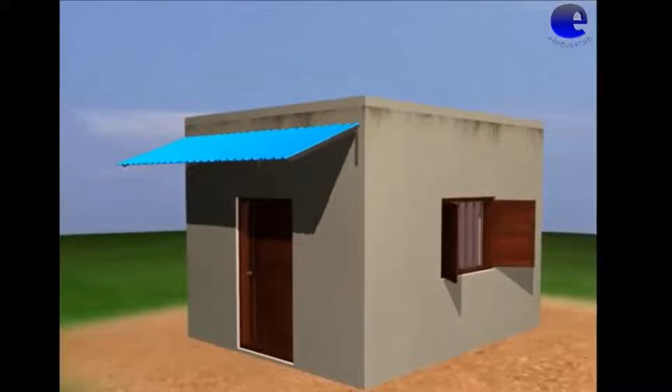A simple building is shown here. A single room, and single-story reinforced cement concrete building. This is the typical skeleton of the reinforced concrete structure. The slab is supported by the beam.

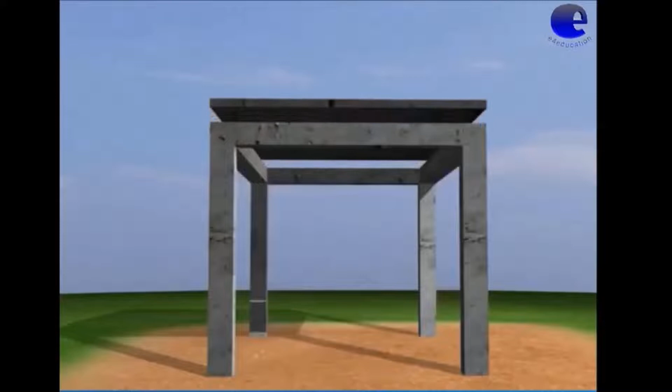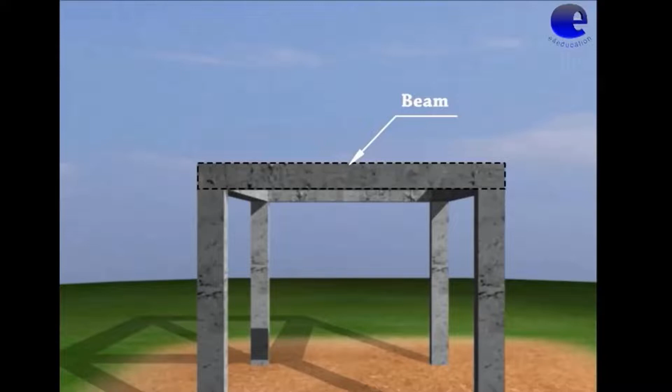Beam is a structural member sufficiently long as compared to its lateral dimensions. Beam is supported on columns. The floor slab and roof slab will rest on the beam. So, the load from the slabs will be transferred to the beam. Before designing the beam, we need to know the forces for which it has to be designed.

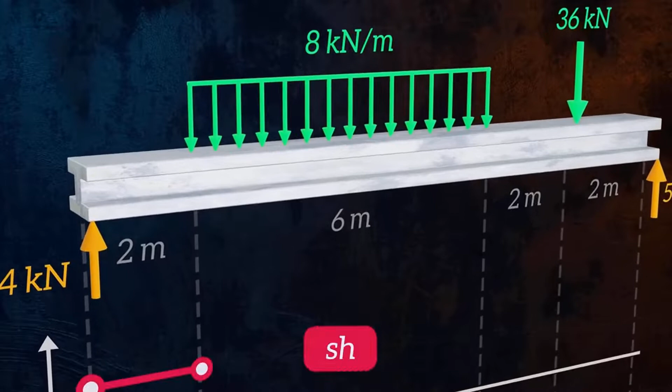Shear force and bending moment diagrams are powerful graphical methods that every mechanical and civil engineer should know how to use to analyze a beam under loading. In this video, I'll explain exactly how to master these diagrams, and we will see how they can be used to understand how a beam is loaded.

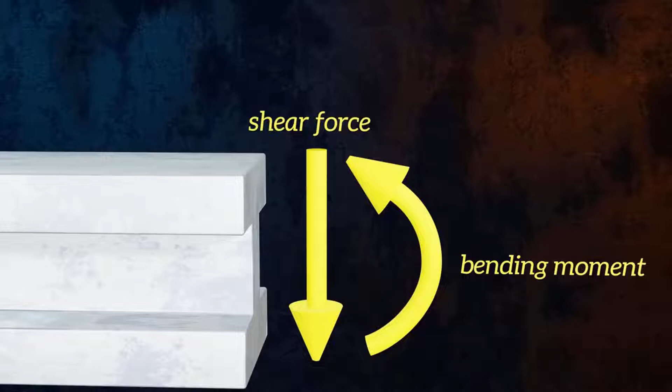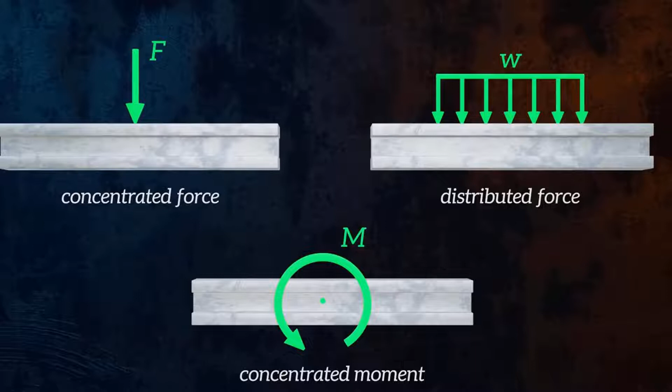Beams can be loaded in a number of ways, the most common being concentrated forces, distributed forces, and concentrated moments. Beams can also be supported in a number of different ways. They can have pin supports, roller supports, or be fully fixed, which each restrain the beam in different ways.

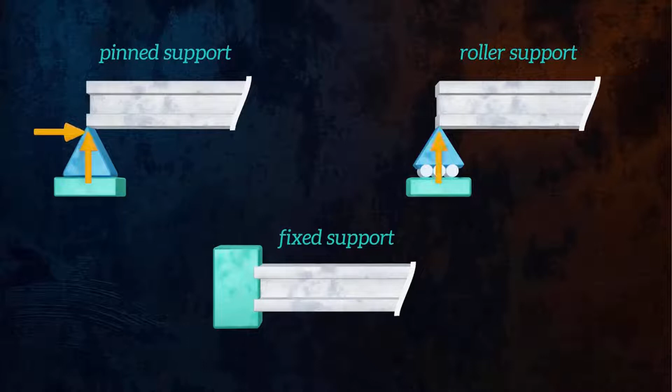Pin supports prevent vertical and horizontal displacements, but allow rotation. Roller supports prevent vertical displacements, but allow horizontal displacement and rotation. Fixed supports prevent all displacements and rotation. If a certain degree of freedom is restrained at a support, we will have a corresponding reaction force or reaction moment at that location. For example, rotations are permitted for a pin support, so there is no reaction moment, but displacements in the vertical and horizontal directions are prevented, so we will have horizontal and vertical reaction forces.

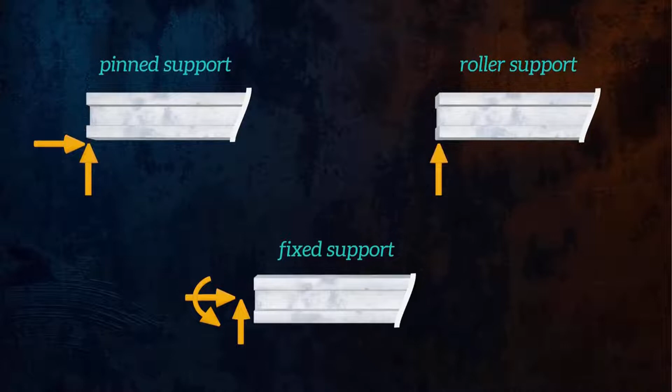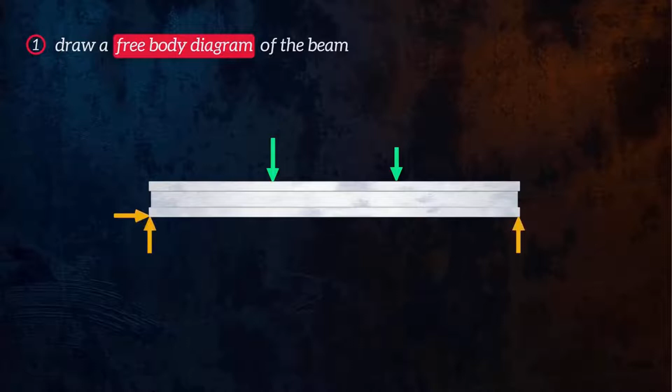So how do you determine the shear forces and bending moments within a beam? There are three main steps we need to follow. First, we draw a free body diagram of the beam. This shows all of the applied and reaction loads acting on the beam. The next step is to calculate the magnitude of the reaction forces and reaction moments at all of the beam supports. We do this using the concept of equilibrium.

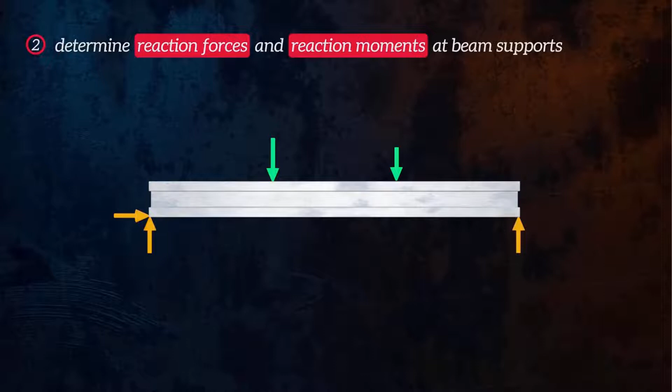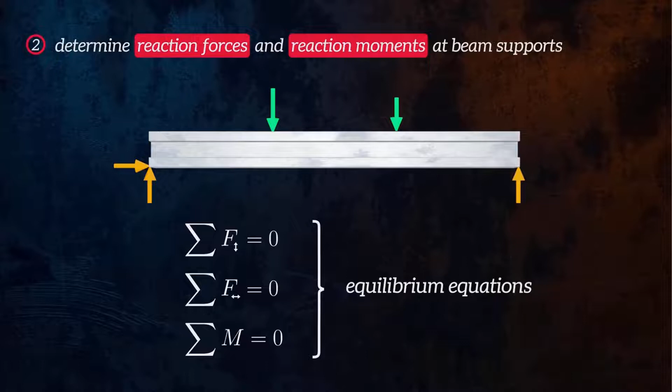To maintain equilibrium, all of the forces in the vertical and horizontal directions should cancel each other out. Similarly, all of the moments acting at every point along the beam should cancel each other out. This gives us a set of simple equations we can solve to calculate the reaction forces and moments. If we can calculate all of the reaction loads using the three equilibrium equations, the beam is said to be

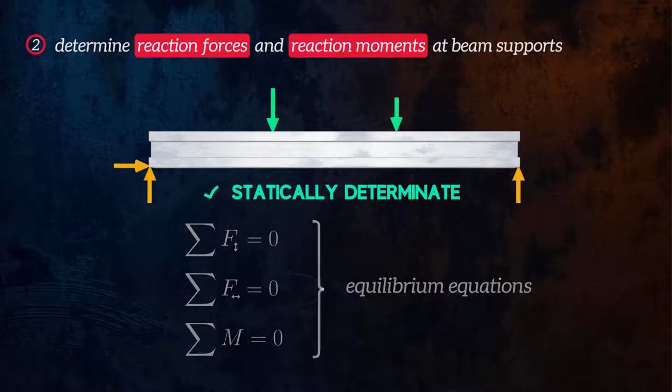statically determinate. For some beam configurations, like this one shown here, we won't be able to calculate all of the reaction loads because we have too many unknowns and not enough equilibrium equations. In this case, the beam is said to be statically indeterminate. This beam has 4 reaction forces, but we only have 3 equilibrium equations. To solve this beam, we would need to use slightly more complicated methods and consider boundary conditions.

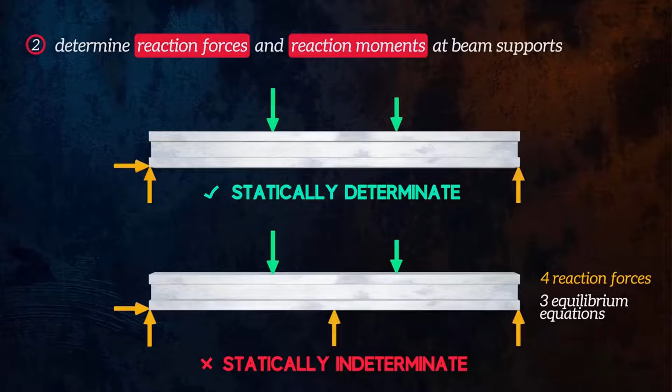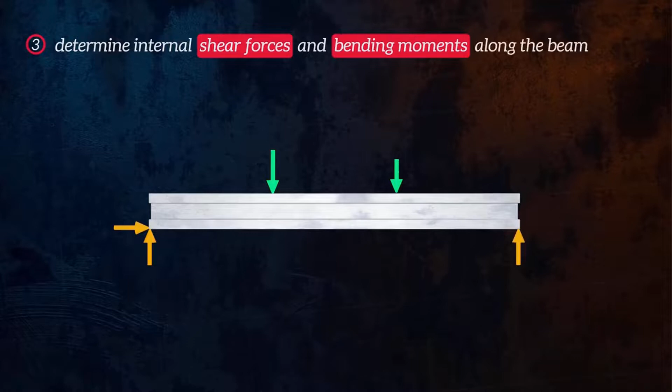In this video, I will only cover statically determinate cases, where we can use the equilibrium equations to calculate all of the reaction loads. Once we have calculated all of the reaction loads, the third and final step is to figure out the internal shear forces and bending moments at every location along the beam. Let's take a look at an example of a beam with pinned and roller supports, loaded by 2 concentrated forces.

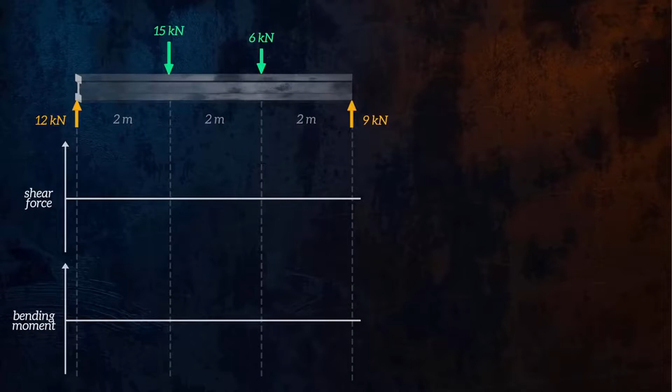First, we draw the free body diagram. We can then use the equilibrium equations to determine the unknown reaction forces at point A and point B. We will start from the left-hand side of the beam. Let's draw the free body diagram for a location immediately to the right of the 12 kilonewton reaction force. To maintain equilibrium, the shear force must be equal to the reaction force. We can draw this on our shear force diagram.

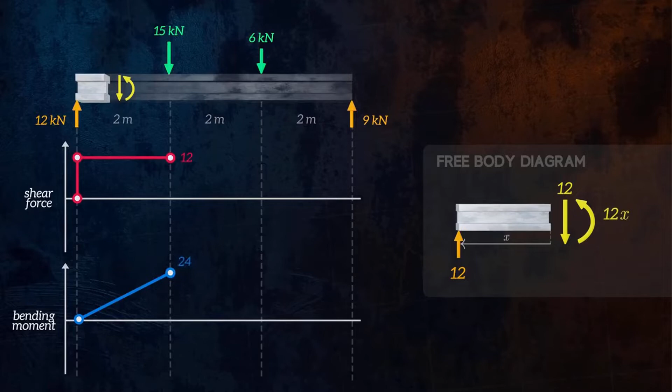The shear force will be constant until we reach the next applied force. The bending moment must be equal to the 12 kilonewton reaction force multiplied by the distance x to the reaction force. This gives us the equation for a straight line, which we can draw on our bending moment diagram. We then repeat the process by moving the location of our cut further to the right. This time we place the cut immediately after the 15 kilonewton force, and we draw the free body diagram again to determine the shear force and the bending moment.

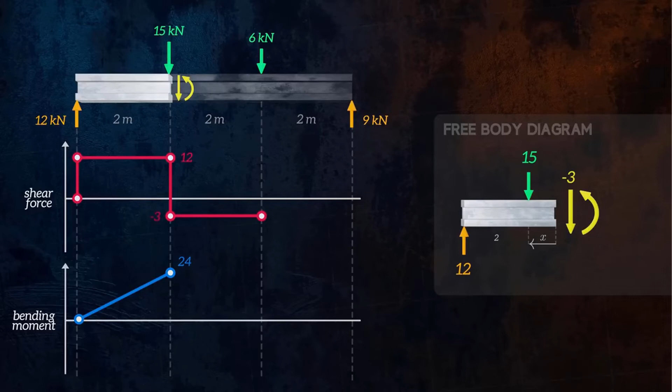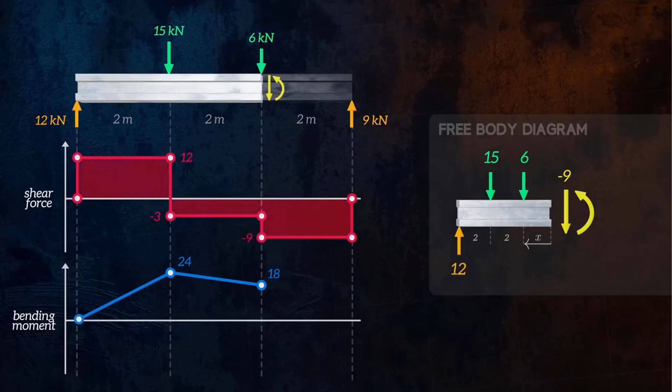We repeat this process until we have covered the full length of the beam. We end up with the complete shear force and bending moment diagrams for the beam.